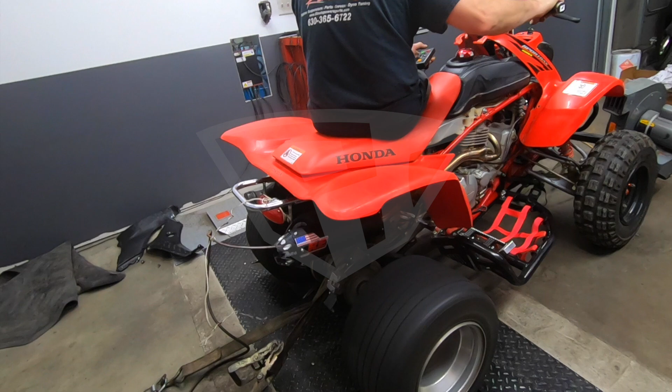I'm super stoked because this box is finally here and it has our new Rossier R4 full exhaust system for our Honda 400EX. I know a lot of you guys have been eagerly waiting for a new exhaust because we still have the stock exhaust on the quad, so I'm super excited to open this up and check it out.

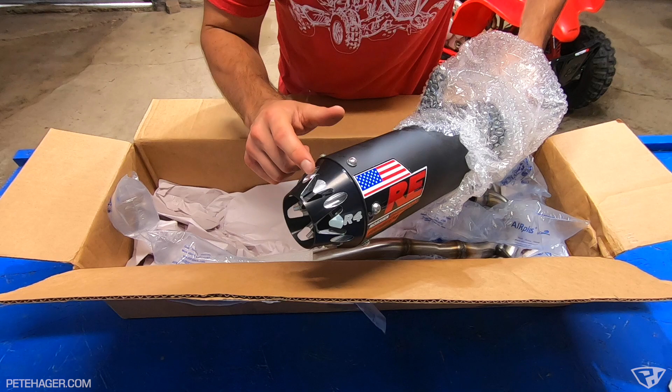Wow. Here is the muffler. We went with the 2020 RE logo and the black tip. I think that looks super sharp. It's going to look really nice. The quad is pretty much all black and red. There's not much silver on it at all, so that was kind of the theme we were going for.

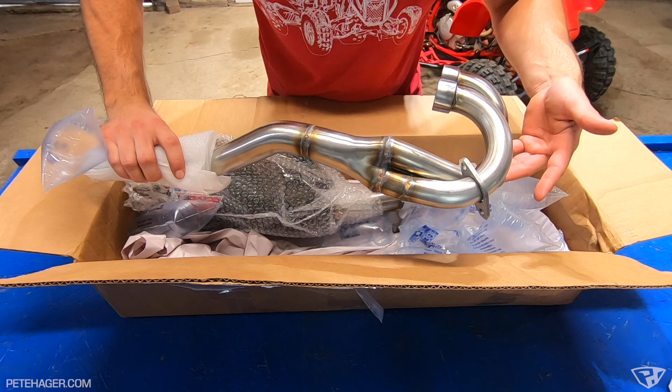Here's the head pipe. The 400EX has that dual port head on it, so it's kind of a dual exhaust that goes into a single here. Looks awesome. Build quality looks great, as always, from Rossier. Just super stoked to have a full system for this, and there's not a lot of companies that make full system exhausts for the 400EX, so it's going to be really great to have this on, and I'm excited to see what kind of power it puts down.

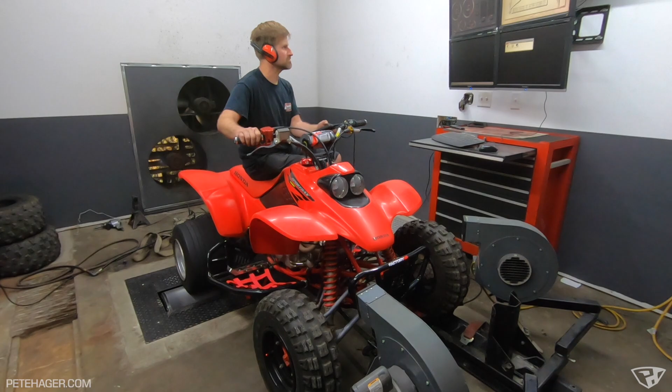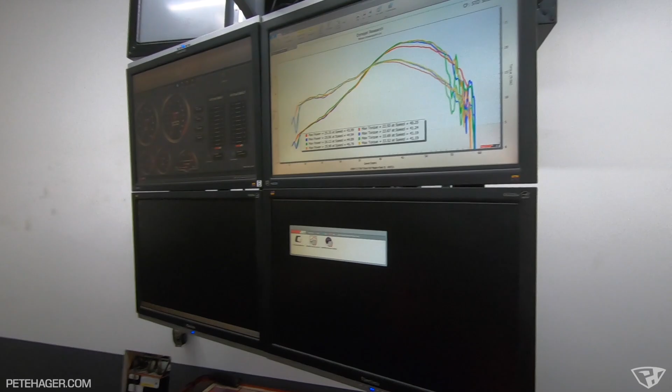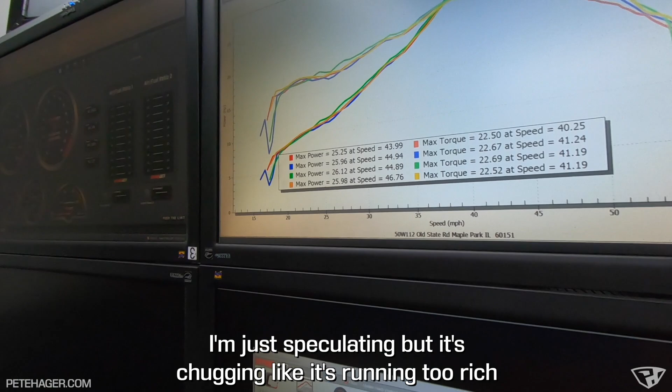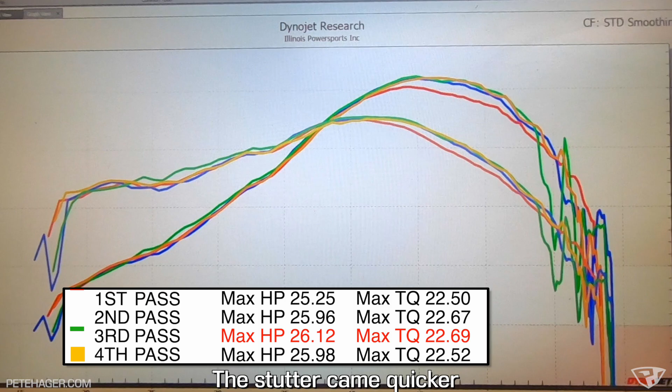Cool. What's with the stutter at the top? I mean, it's just kind of weird. It's probably running too fat, if I had to guess. Oh, okay. Interesting. We don't have an air fuel meter in it, so I'm just speculating, but it's chugging like it's running too rich. So it pulled 26.12 for peak, and that was also peak torque, 22.69. As it got warmer, the stutter came quicker. Yeah, it tells me it's too rich. Oh, okay, cool. That's interesting.

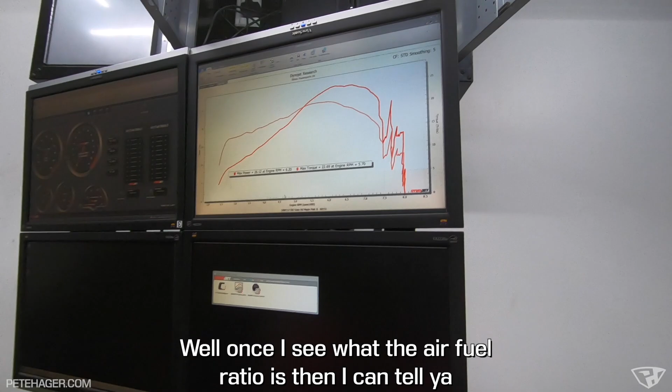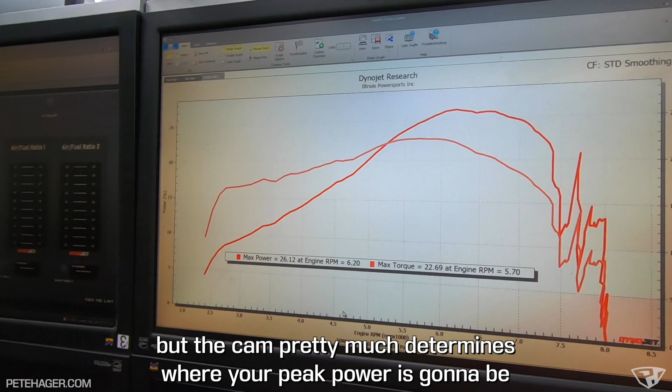So how much do you think that'll get cleaned up? Well, once I see what the air fuel ratio is, then I can tell you. Will that move the peak power to a later point in the RPM, or is that kind of where peak power is always going to be made? That's where the peak power should mostly be. It might move up a little bit, but the cam pretty much determines where your peak power is going to be. Well, I guess that's that. Already changed the pipe on it? Yep. Now, let me cool it down quick. It's probably a couple minutes to cool it down. Yep.

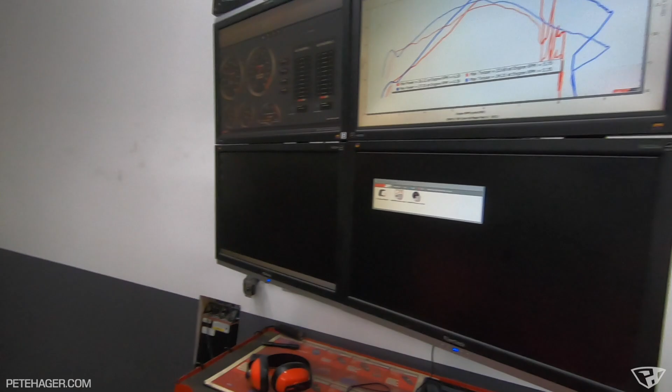Yeah, it ran really nice on the top end there. There were no adjustments with the airbox lid off. Okay. I know it's not a ton of power overall, but still, that's pretty funny just to take the lid off. Yeah, look at how much better that ran off the top. The theory I use for people is, go try running a marathon breathing through a straw. Yeah, exactly. It makes sense.

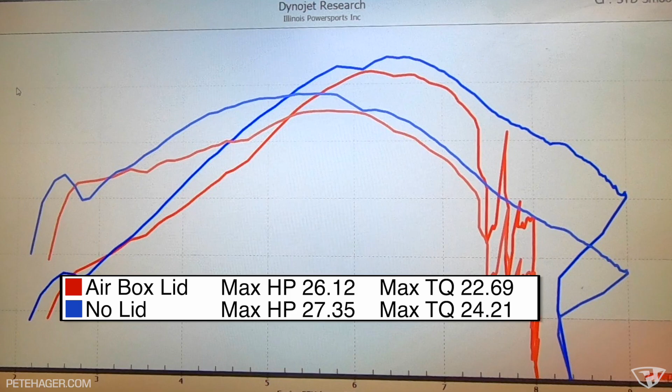Okay, what do you think about that air filter on there? It'll be fine, the K&N. I'm not saying it's not running lean, but it has a way nicer curve right now. It's not telling me it's running lean. But of course we don't have the air fuel meter in either. When we put the pipe on, we'll be able to get the air fuel meter in there, because there's a spark arrestor in there now, so we can't. I'm not going to put a hole through it just for no reason.

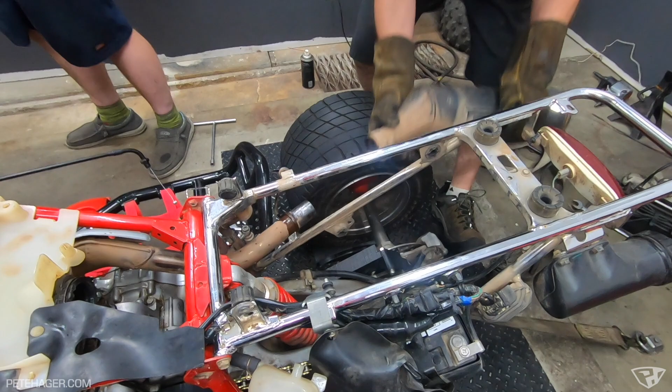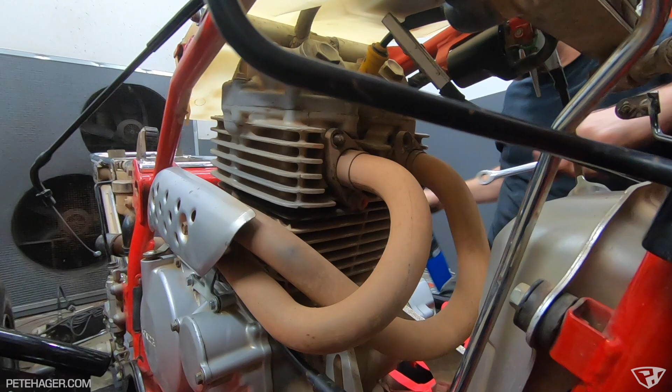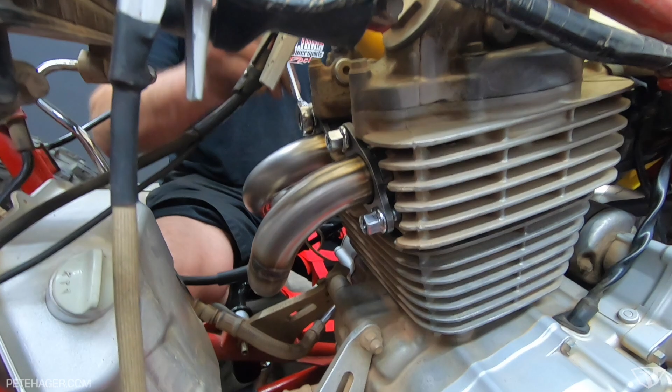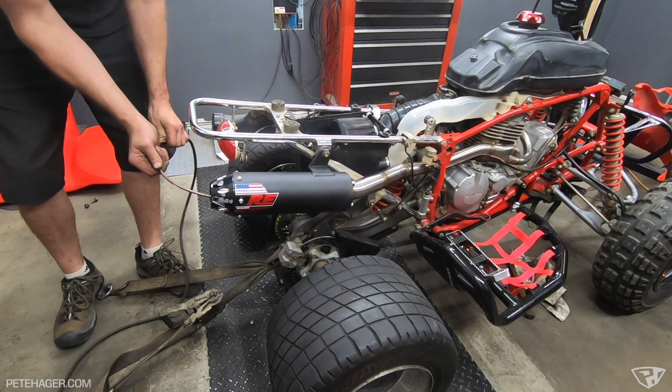Something just came loose. There you go. Okay.

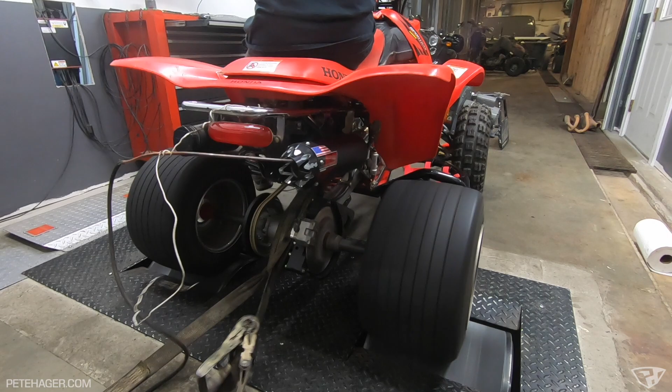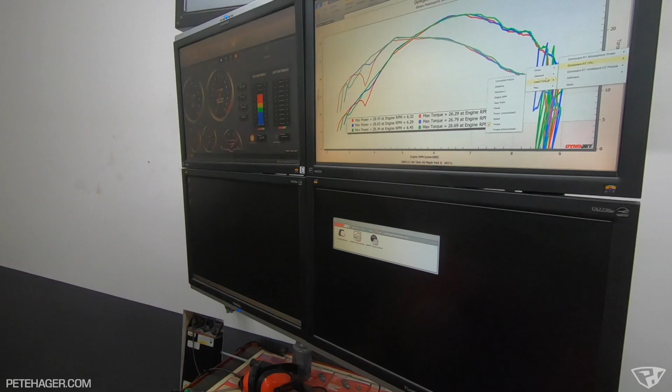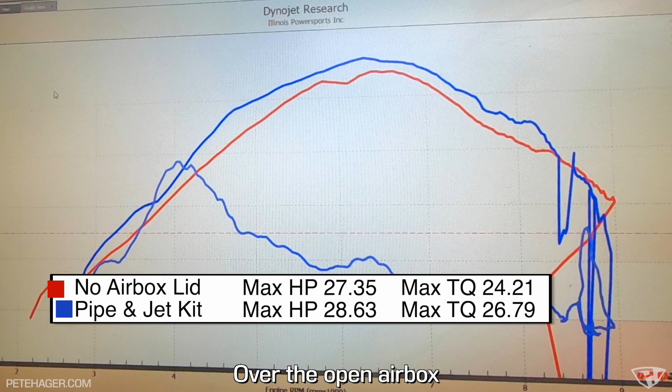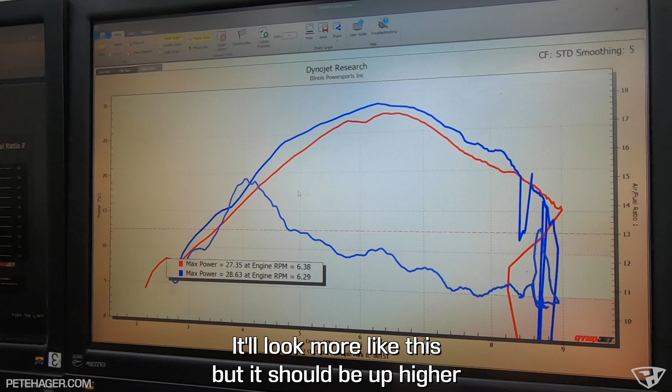Choking out in the top. So we just put in the jet kit, at least that's where it is right now. So it made power everywhere. Yeah, definitely, over the open air box. When we trim some fuel out of it, we'll make more power here and it'll carry the power out further. It'll look more like this, but it should be up higher. So what are you going to adjust right now? I'm going to change the main. I'm going to go look and see what they sent us.

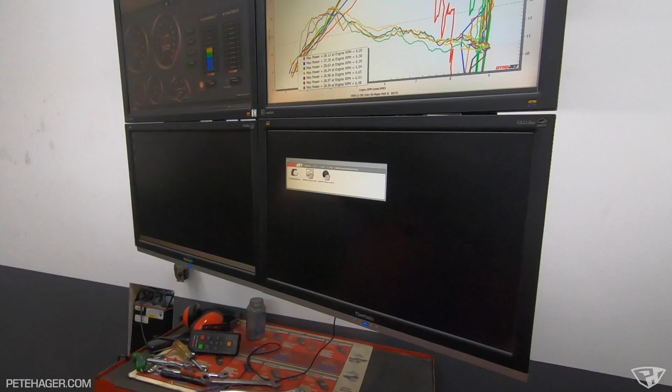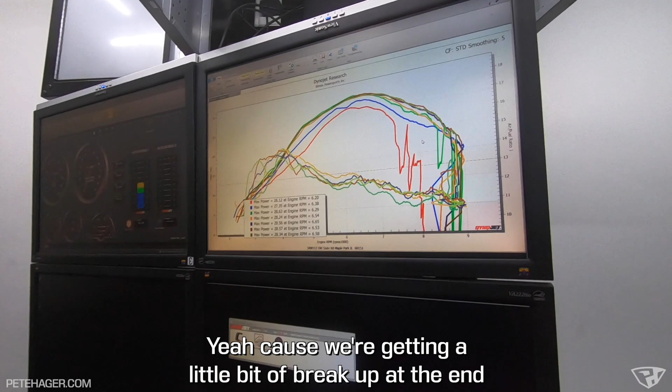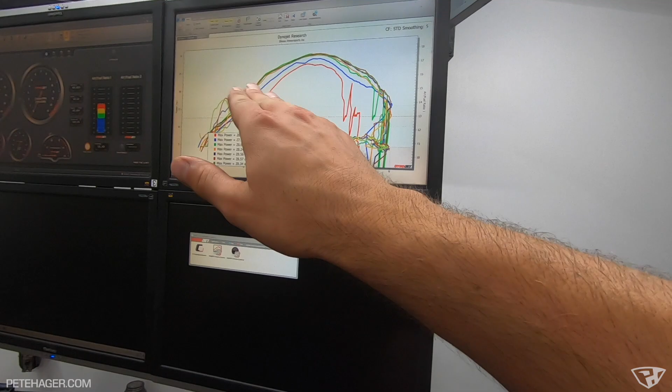Sounded healthier. See our lines coming up here now? Because that's where we were before. Still a little on the fat side. Probably drop down two more sizes. Really? Yeah, we're getting a little bit of a breakup at the end. You'll never be out that far, but I want it to be clean all the way out to the end. You're normally adjusting every point of the rev range with it being fuel injected. With it being carbureted, do you jet it for peak power? Is that how it works?

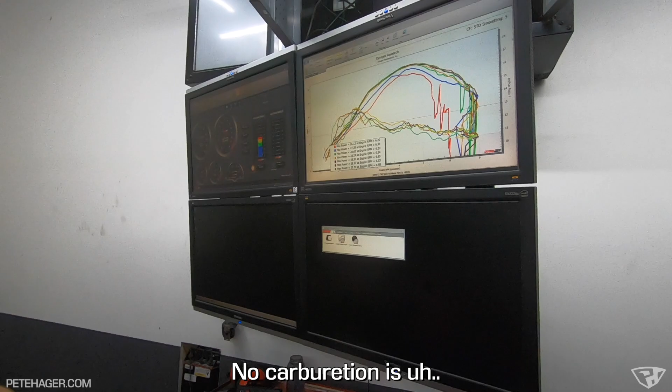No. To me, a carburetor is a controlled fuel leak. A carburetor is kind of a compromise. Yes, you can get it really close, but it's never going to be perfect everywhere. So you have to pick your battles and look at the big overall picture. That makes sense. Fuel injection, we can pinpoint anything we really want to. With the carburetors, it is what it is, but we can get it really close.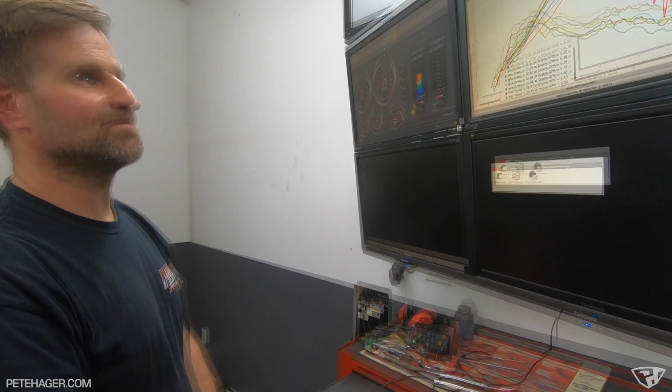So when it's above here, it's rich? No, that's lean when it's above. Okay. You can have a false lean, but you can't make up a false rich. False lean can be an air leak, and it's sensing more air and reading lean. We don't have a false lean, but people would wig out if they knew there was a 150 jet in here and it called for a 170. Like, why are you jetting it down so far? They send that out so they know you're not going to burn the thing down.

This is the difference between putting in a jet kit and dialing in a jet kit. It's not like it didn't run with the 170, but it was cutting out on the top end. This should eliminate the cutout. It may not be perfect, but our line will probably be about right here, if I had to guess. I like just tiptoeing up. The other way is to make a huge change, and if we're too lean, now we at least found our window and can divide jets between it. Now we're just chipping away. But our peak power shouldn't really change. No.

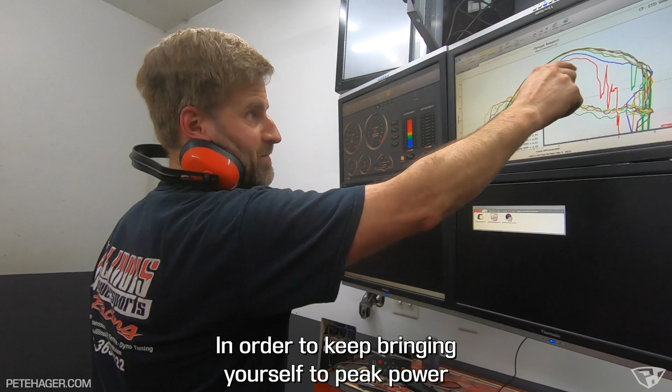We're trying to clean up the over rev, but with this machine he should never, ever hit the over rev, because ideally you're looking to shift, keep bringing yourself into your peak power when you're losing your 1200 to 1400 RPM between the shifts.

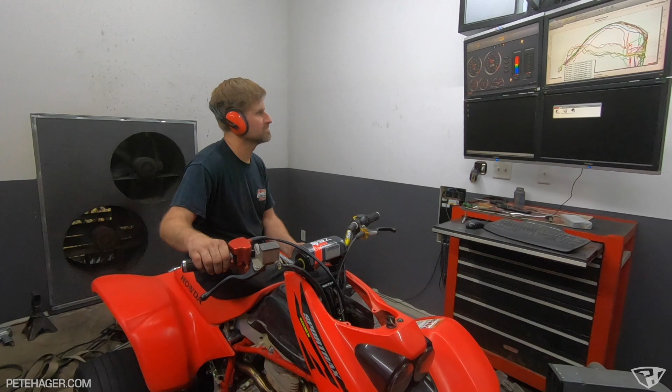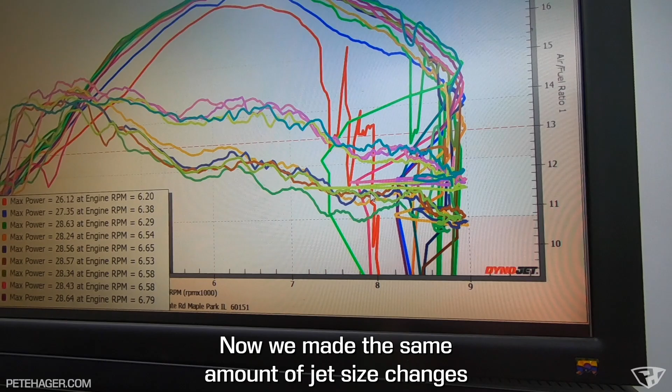Yes. You see, when we made our first change, we went from this to this. Now we made the same amount of jet size changes, and it went from this to this. That's too lean. That's a big change. So we went from the 170 to the 150? Or did you just go from 160 to a 150? 150. So we want to put a 155 in now and see where it's at?

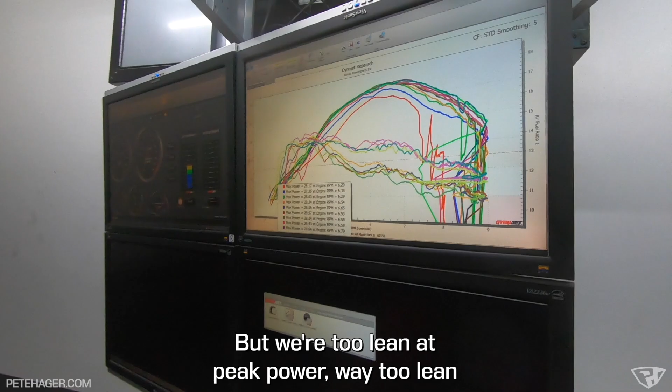We'll have to see where your fuel is, but it did clean up the stutter. We had one little hiccup there, but that wasn't a fuel hiccup. But you see, it cleaned it up here, but we're too lean at peak power, way too lean. I don't want this peak power number to be anything above that. So do you think the 155 will be still too lean? Well, one way to find out.

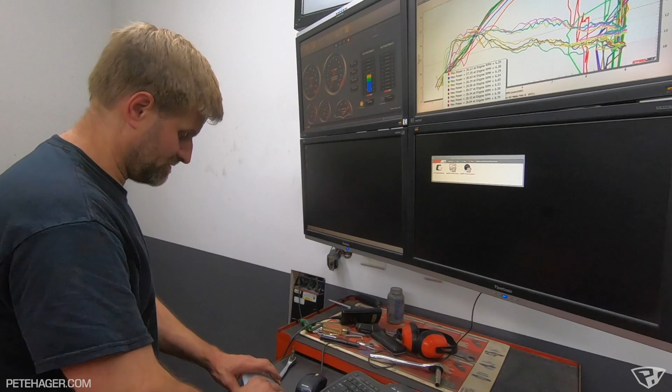So if that's too lean, then what do you do? Then we gotta put a 160 back in and call it a day. And just call it a day? Because that's all we can do. Okay.

But did you see how when I was just tooling around, I was staying way down in the blue? Yeah. You're totally fine. Even when you hit it, if you're up in the RPMs a little bit and you full throttle it, you'll never be above the lean line. It always stays on that. That's only when we're pulling way down from like 2,500 RPM, zero bog.

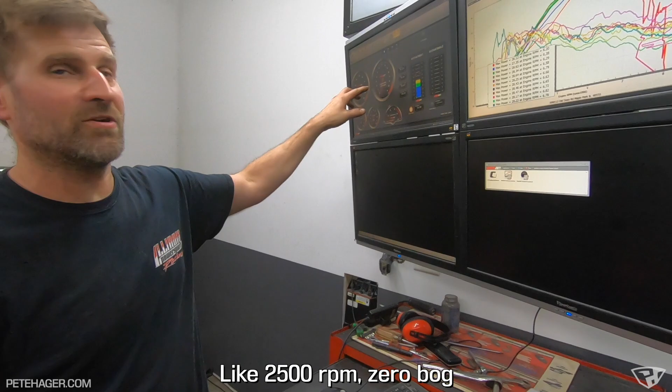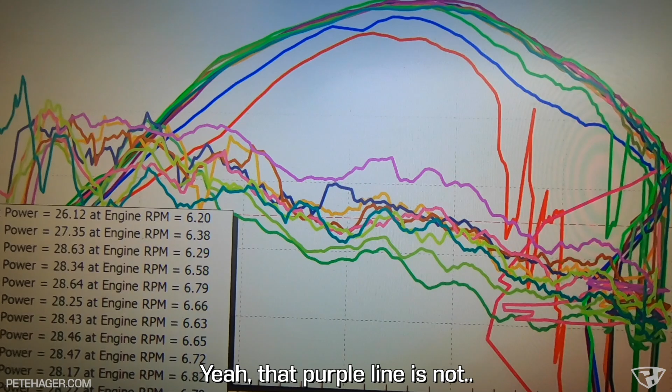It's just when I'm at 2,000. 2,000 is technically really idle. This one's a little low, but it'll be fine. So we pretty much got it dialed right into the sweet spot now. Yeah, the purple line was from before, now we're right here. This is our most recent line, our green line. Let me take them all out of there. Yeah, that looks sweet. That's the best compromise we're gonna get.

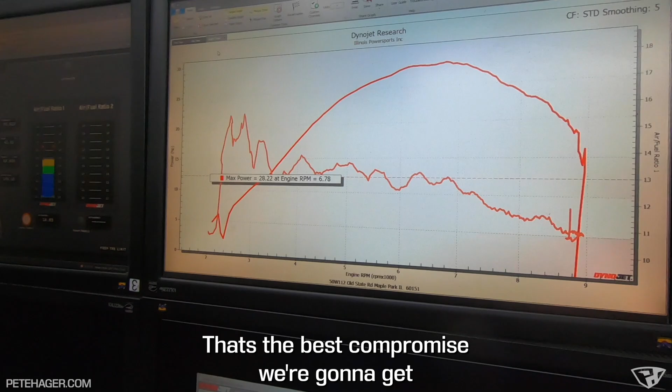Wow. Makes steady power. That's how it feels when you ride it. But it seems like it's gonna pick up a lot better. Yeah, we'll have to see the overlay with how it was when we brought it in.

Let me cool it down just for a couple minutes, and then we'll make our passes, because right now we're all heat soaked. We're not gonna have a real valid comparison with this particular jet since we're changing jets so fast. So we'll literally let it cool down for 3 or 4 minutes and run the fans. Then we'll make a couple passes, and we'll be done. We can put it back together. Cool.

Because we're doing too many passes all in a row, by the time we're done, it'll go down a little bit in power. Now we took it back down to where we were when we first started to jet, so it's more consistent temperatures, and this is a more accurate comparison. There's our number right there, 29.26.

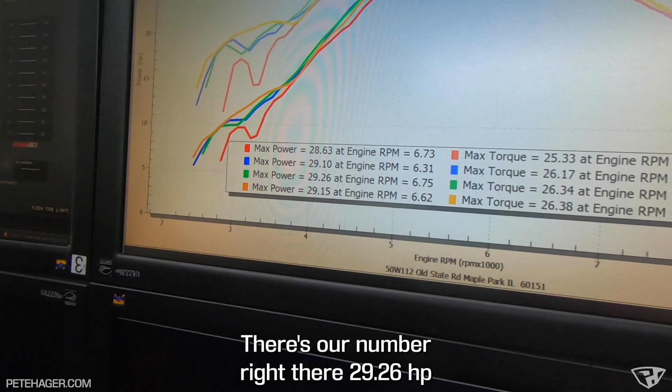Now we'll do our best pass from when it came in. Our pass coming in is going to be good because we were coming off a full cold. So that's actually a little bit elusive. It's going to be a little higher number than what it normally would be right now, because we never cooled it down to full cold. Wow. Look at that. Progressing.

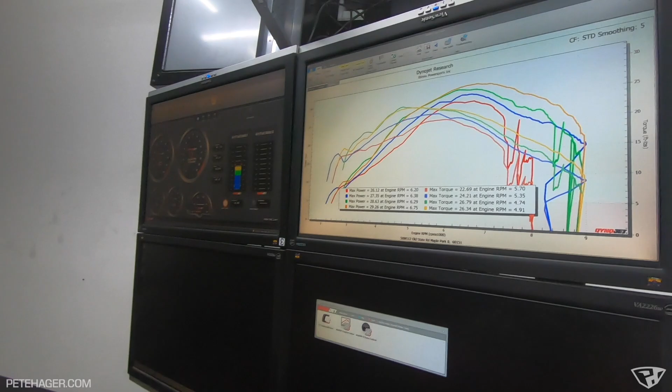Red is the baseline run, brought in as it came from Honda, short of a filter, but in the stock box with the lid on. So it really didn't make a difference. Blue, taking the airbox lid off, no other changes. Green, putting on the pipe and the jet kit, setting it up exactly the way the instructions wanted it. And then yellow is dialing in the jet kit. Wow.

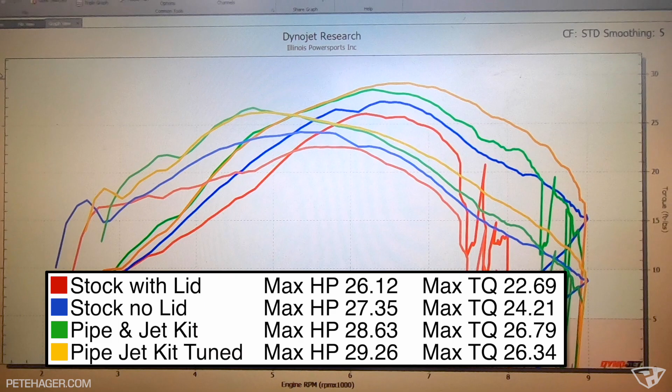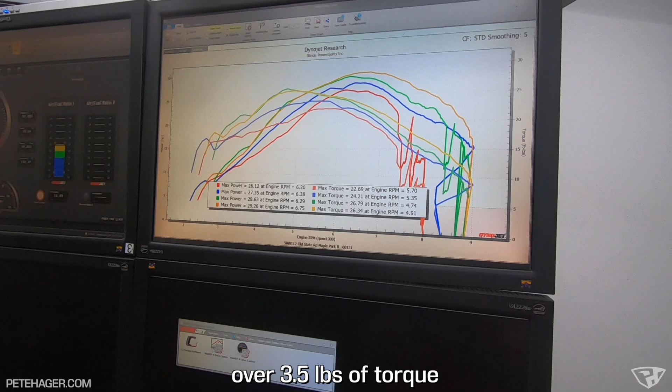Torque's impressive, I just noticed that. That's a big jump in torque too. Yeah, a good 3.5 pounds. Over 3.5 pounds of torque. Wow, that's quite a bit. And it's the way it makes the power. If you look at how that, could we do the red line versus this darker yellow? Yeah, let's just do the first and last pass.

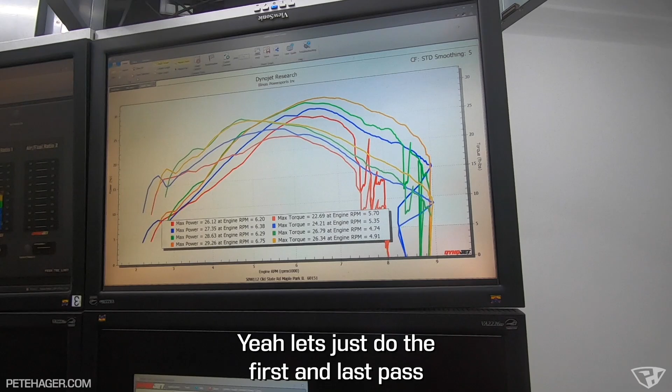So when this thing made 26 horsepower, it made over 25 horsepower, let's just use a round figure, for approximately 1,000 RPM. Now it's making 25 horsepower for 3,000 RPM. That's a lot. 25 horse or more. And it's pushing near 30 at peak.

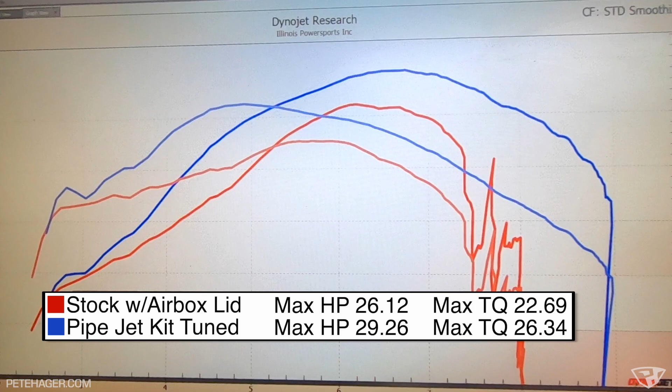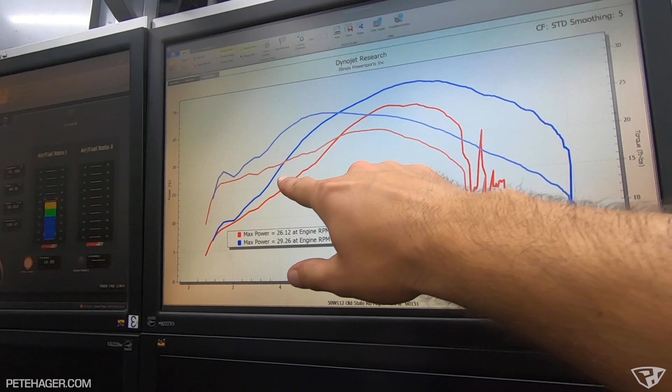Yes. So the area under the curve is huge. The bottom end is huge. Yeah, it's coming on way stronger right here. Well, then look at the torque. Yes, that's crazy. That's going to be so fun. I can't wait to ride it. That's sweet. 10 more minutes, you'll be on it.

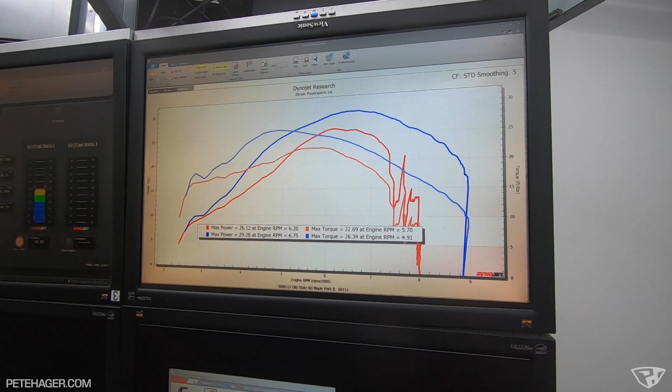Thank you, appreciate it. Always working your magic, man. That's great. Well, I'd say it's going to be perfect. I didn't want this thing to be some crazy powerhouse of a machine, but this will be enough just to make it a little more realistic to ride. A little more consistent. We can put this thing together. Let me give you this so we don't forget that. Yep.

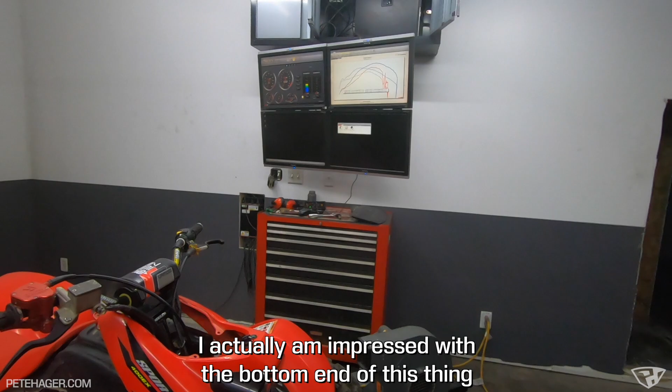Crazy. Actually, I didn't expect it to be that big of a gain. That's a huge gain. I'm impressed with the bottom end of this thing. Yeah. Sweet.

Okay, we're going to take this for a little rip, but it has got to be gusting to 40 miles an hour plus right now. I have not seen wind like this in a while, so it might not be the most accurate for sound. But this thing is making a lot more power everywhere, and it's going to be crazy to ride it real quick before we load it up. Well, that's already a noticeable change. Man, it's got a really good sound to it.

That's noticeable, 100%. It's a lot crisper when you hit it. You notice how it bogs when you're on the street? Yes. I mean, if you're lugging the thing in fifth gear and go to whack it, maybe. But normal riding, you'll never ever feel it. No, it's great. You good?